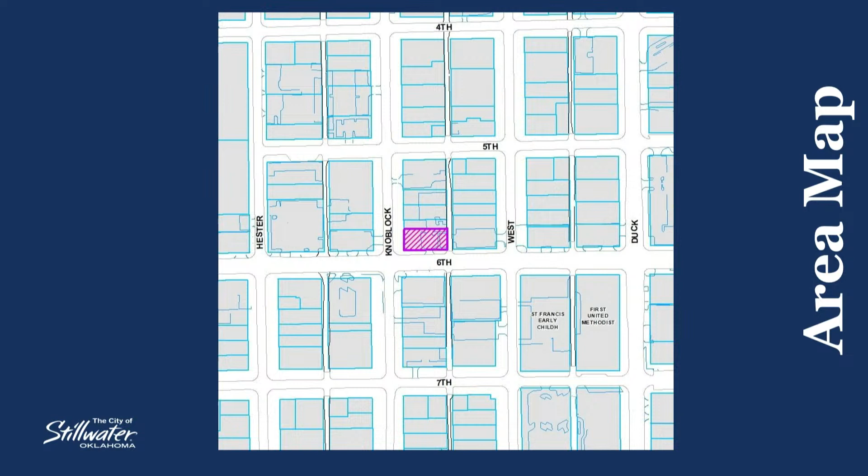You can see the subject property on this graphic inside the black hatch pattern, but you'll also note the other zoning districts in vicinity, including T5.

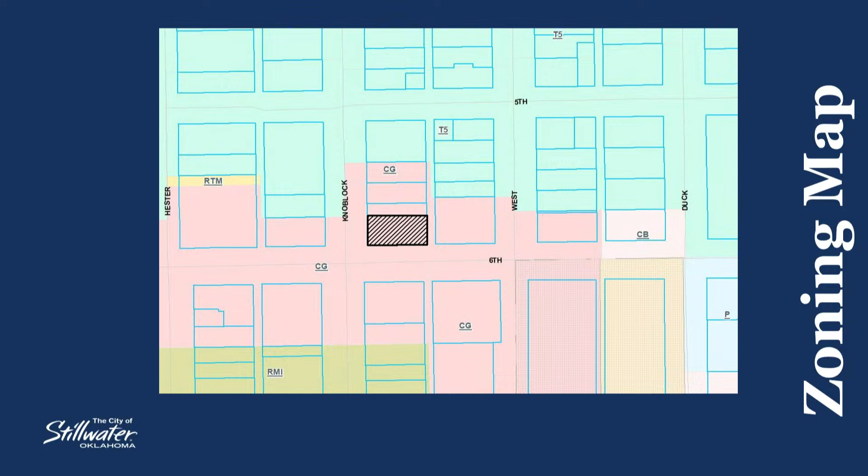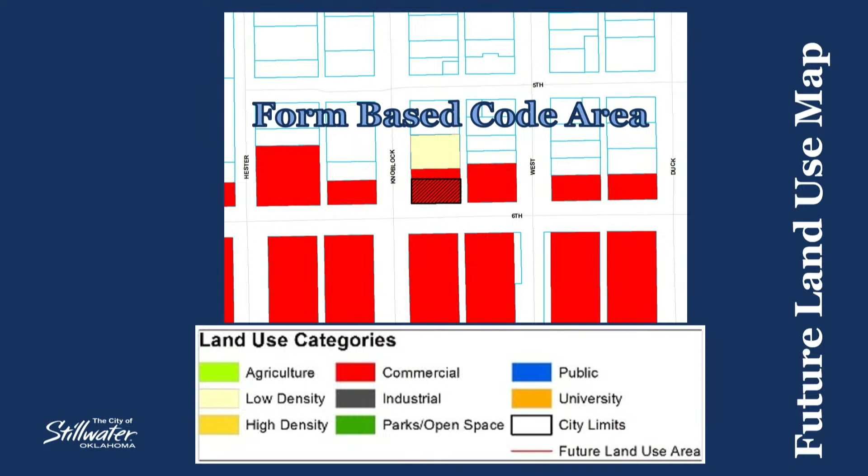The future land use map of the comprehensive plan indicates commercial along the 6th Avenue corridor, and that's better identified here on this close-up with the subject property inside the black hatch pattern. We'd note the area to the north in white is the form-based code area. That's that T5. On the future land use map, that's shown as its own inset. So we just wanted to give you some additional information there to help identify and clarify things.

Questions of staff? Questions from the commissioners? Seeing none, thank you, Mr. Harkins.

This time, I'd like to ask for anyone in the audience to speak in favor of this item.

I'm Diego Enzensberger with Ghost & Associates, and we're at 113 East 8th Avenue. We're here seeking approval for this specific use permit to operate a medical marijuana dispensary on property at 524 West 6th Avenue, and I can try and answer your questions.

Any questions from the commissioners? Thank you very much. Thank you.

Is there anyone else in the audience that would like to speak in favor of this item? Yes, ma'am? We cannot understand you all. You can't hear us? Is that better? That's better. Is there anyone else in the audience that would like to speak in favor of this item?

Seeing none, is there anyone in the audience that would like to speak in opposition of this item? If you'd like to come to the podium, state your name and address for the record.

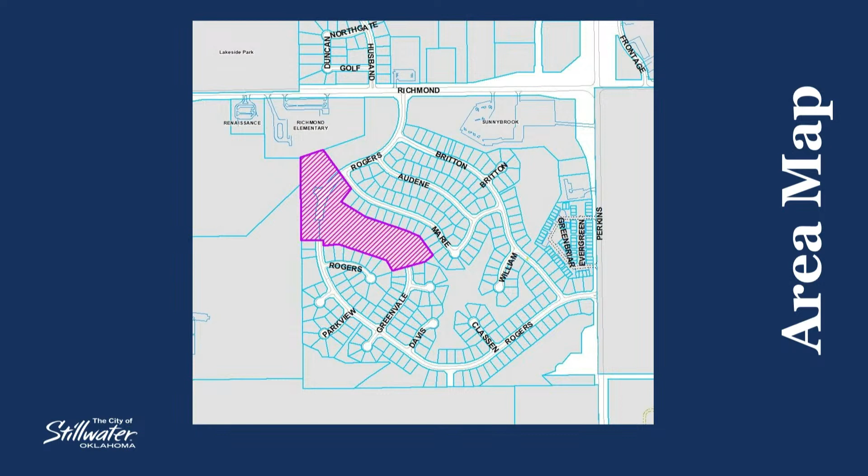Mr. Harkins. Thank you, Madam Chairman. Commission members, Ryan Harkins again for Community Development. Parkview Estates, Section 10 as proposed is before you as a preliminary plat tonight. The subject property is inside the purple hatch pattern on your screen. You can see some existing development that has been built out, other development that has been platted but not built out yet, and areas that have not been platted yet or taken through a preliminary plat, hence this section coming before you tonight.

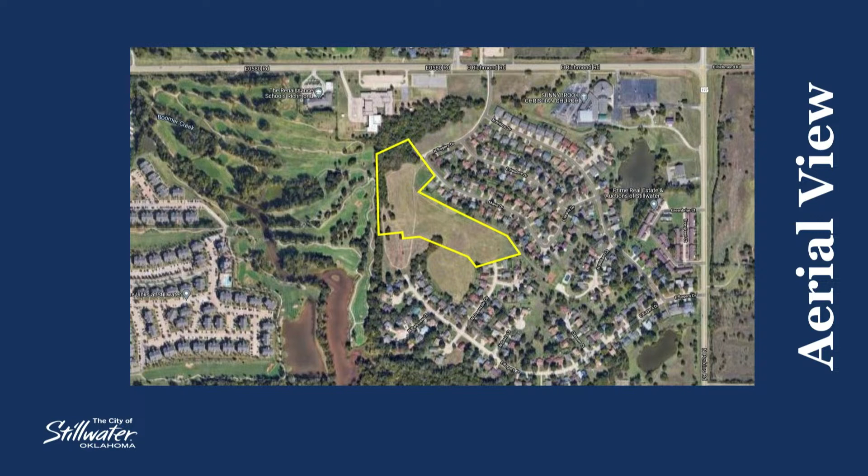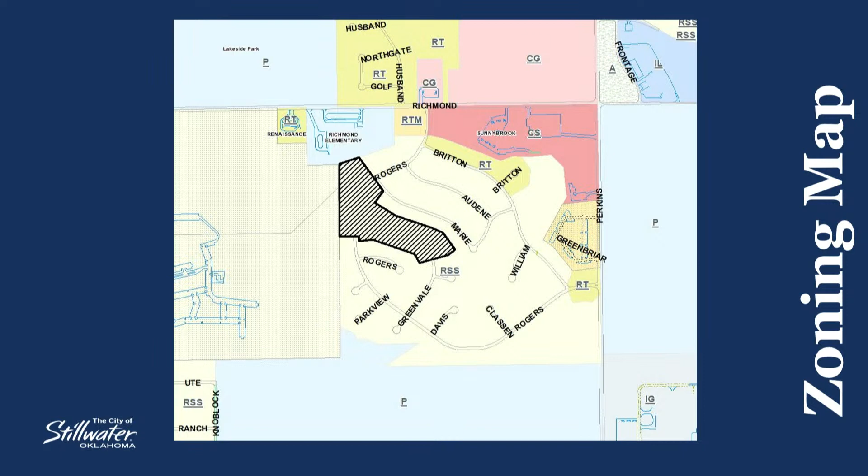You can see on the aerial a better view. The subject property is inside the yellow polygon, and you can see where existing streets start to connect to it. This gives you a better idea on the zoning. This is an RSS zoning district, small lot, single-family residential, so a 5,000 square foot minimum lot size is required, the same as the adjacent parts of this overall development.

You'll also note in the staff report a request for a subdivision exemption for one lot in particular, lot 14, in the northern or northwest part of the proposed development. The reason for the exemption request is that in RSS zoning there's a 50-foot minimum lot width, and lot 14 does not meet that standard at this time. They've supplied reasons dealing with drainage and topography as to why they're laying out lots 14, 15, and 16 the way they are, but the exemption request is specifically for lot 14. The other lots can meet the requirements.

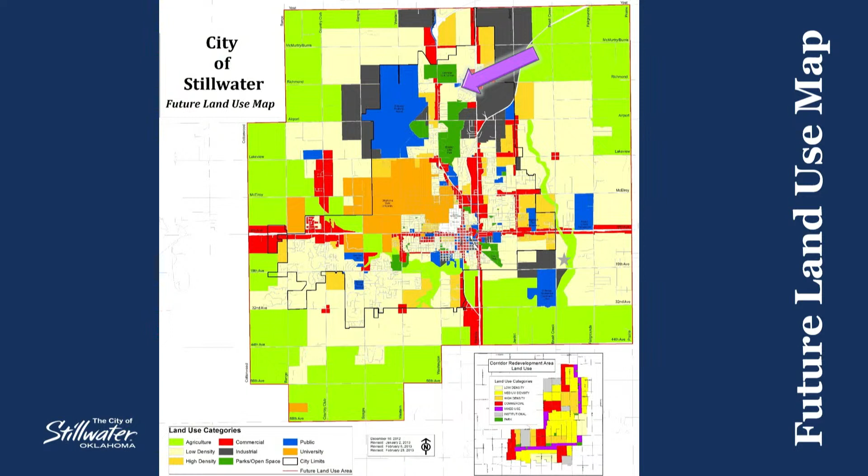The future land use map of the comprehensive plan indicates this as being an area of low density residential, which in the comp plan text can be up to 20 dwelling units per acre. The subject property on the close-up of the future land use map is shown in the black hatch pattern, again low density residential with some public and other uses nearby.

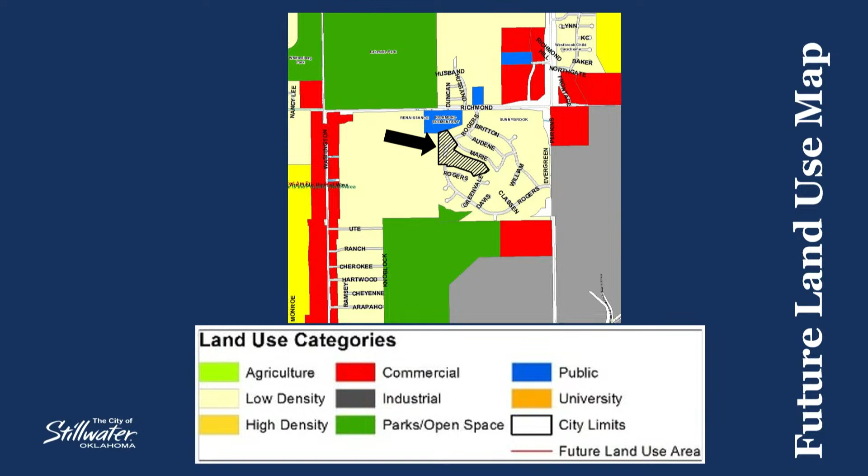I do know the applicant's engineer is here tonight and will try to answer questions as best they can. They're dealing with some vocal issues due to a sinus infection, but want to be responsive. Staff will also note, before we go to the public hearing, an email we received this afternoon dealing with drainage issues in the proposed development. We also know from phone calls today there are concerns dealing with drainage and access as well as sight lines. So, any questions staff can answer before the public hearing is opened?

You mentioned 20 per acre? Correct. The comprehensive plan talks about low density residential being a dwelling unit density of up to 20 units per acre. Okay. And they're proposing 37 lots, so we're well below that threshold. Okay.

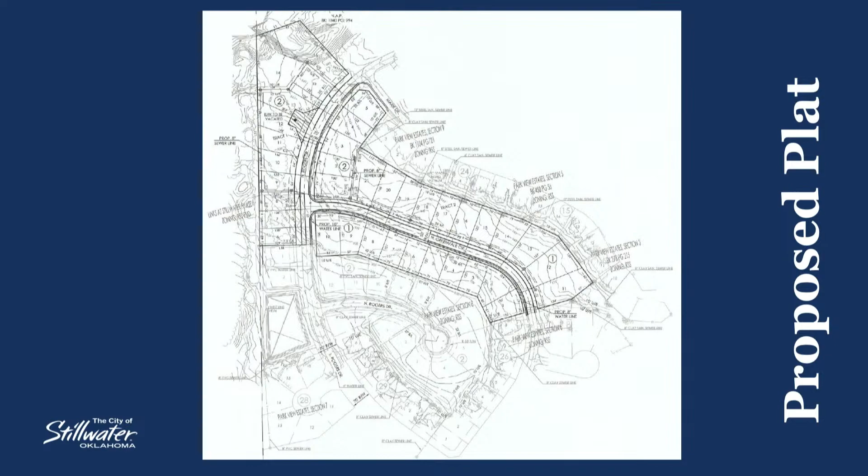If it is mowed short, the water is able to shed and go that direction. When the lots are a little bit higher, that water literally backs up. I do understand the curbs are there to act as waterways, but most of the time when the water is up over the curb, it no longer is effective. It's actually going to come into our yards. So I'd like to echo that as well. Thank you for your time. I appreciate your consideration. Thank you very much.

Anyone else who'd like to come speak in opposition, please state your name and address for the record.

Hello, my name is Julia Ray. I live at 4719 North Britton Drive. As a clarification, I am a member of the Homeowners Association for Parkview Estates. Just some concerns—I think opposition might not be the best word, but we'll echo the drainage concerns for the neighborhood. The flood we had several years ago was quite significant and bothersome for those homeowners. It's a 47-year-old neighborhood—I'm 45 and I don't work like I did 20 years ago—so we have some 47-year-old infrastructure, and that's a concern.

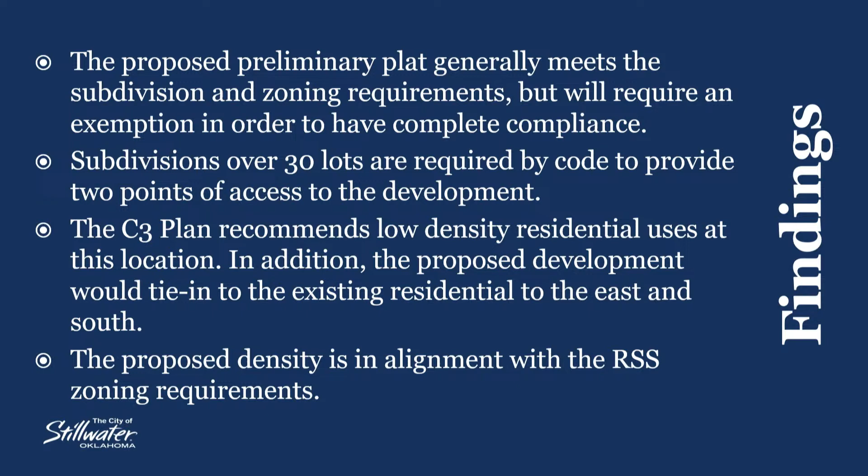Staff feels that if the issues regarding drainage, which the drainage report has been approved by the city engineer and their staff, and the infrastructure issues can be resolved, staff has no problem recommending approval of the preliminary plat. We do understand there are a number of considerations and concerns raised, but having said that, with these findings, the alternatives available to you are to accept the findings and approve the proposed preliminary plat as presented.

You can approve this plat with conditions, noting what those conditions are and what should be met for approval of the final plat. If you choose that option, we will develop a letter listing those conditions for the developer and their engineer, and it will be signed and become part of the record that goes with the plat. You can also reject the findings and deny the request for the proposed preliminary plat as presented.

But if you feel there's additional discussion or information needed, you can table this item to a date certain. We note here that you have to table the request to a certain date, noting that action must be taken within 60 days of the public hearing. So, for example, if you wanted to delay to the first Planning Commission meeting in January, you could do that, giving the developer time to address any of these other issues or bring additional information. But you would need to take action within 60 days of this date.

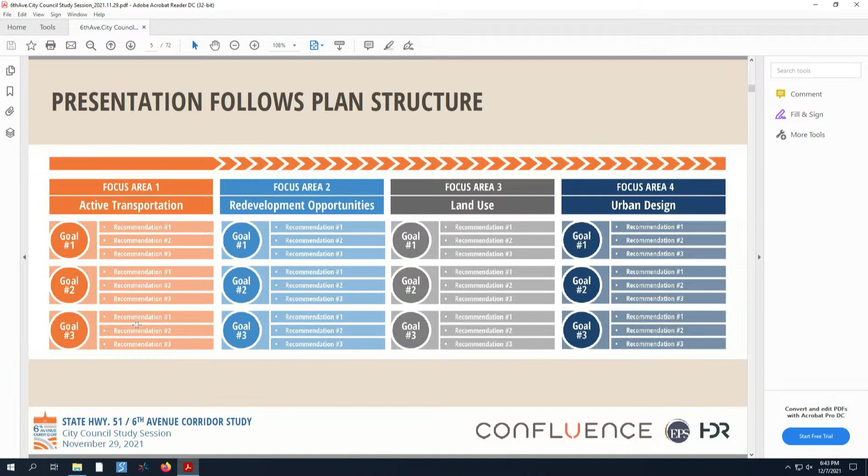So let's talk first and foremost about that. Goal number 1, with regard to active transportation, that became a key issue, is trying to connect the north and south sides of 6th Avenue. 6th Avenue is a right-of-way that acts like a zipper in the community, meshing 2 different sections, if you will. Those areas we heard from people early in the process said it's very difficult to get across. It functions as a great roadway, but it's also a barrier at times. So we tried to look at key connections going north-south and develop infrastructure to help support that.

One of the things we looked at, as you see in recommendation number 2, is using a stream called Duck Creek over by Westwood Elementary to get people across 6th Avenue. And one of the things we knew from the beginning of the process was discussions about a rails-to-trails conversion for the railroad tracks over by Perkins. So that's one of the recommendations as well, trying to pursue or continue to pursue that conversion, along with a continuous north-south connection at key intersections.

We also looked at trying to enhance circulation and connectivity by having a more complete and active transportation network on key east-west streets, as well as off-street paths around the perimeter of Westwood Elementary to help connect that area to a broader network. And then we tried to coordinate more with OSU to help connect this system, as it gets built, to an internal system on campus and then beyond to a greater part of the community.

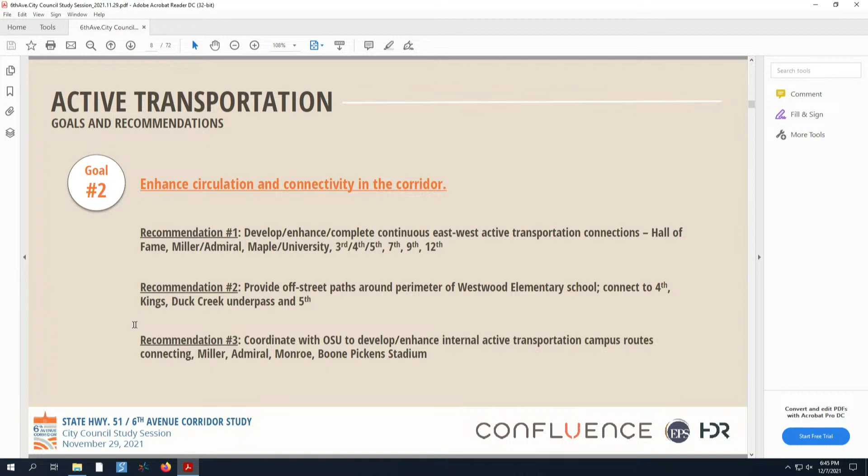One of the other goals with regard to active transportation is trying to connect the OSU campus to downtown. That was one of the issues we heard from the very beginning—for years we've wanted this, but we've never done anything about it. So this tries to address that issue, not only with an active network dealing with key streets, but also dealing with some of the crossings.

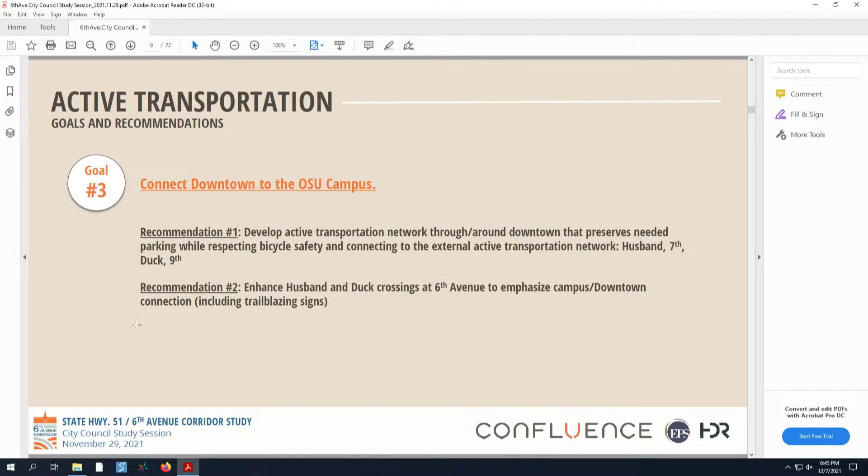So to give you a quick idea, again we looked at that north-south connection across 6th Avenue, but also key east-west routes that could run parallel to 6th, with the idea that we know there will be people at times on 6th, whether jogging or biking—you won't stop that. But what we can do is try to provide a robust network of opportunities that run parallel to 6th Avenue, giving people more opportunity in a safer environment to stay off that corridor and still have the ability to connect from, say, out by Western and 6th into downtown.

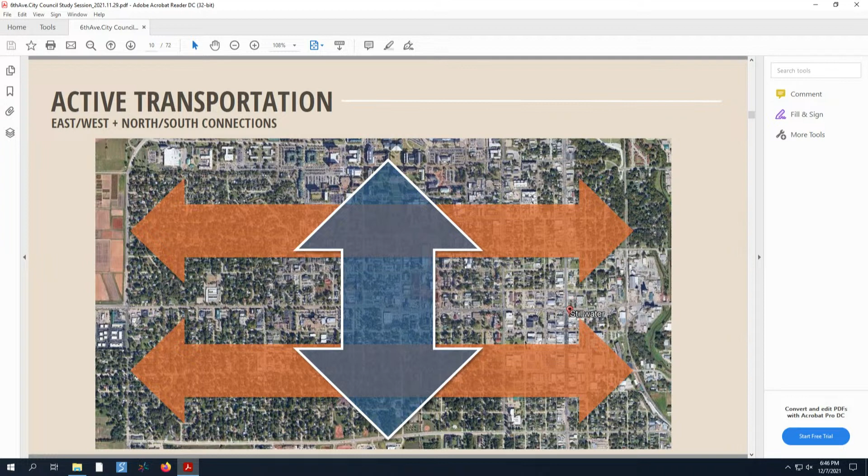And we did that through different sets of intersection improvements and facility types, and you'll see some examples of that in a moment. One of the things we looked at is what's there now, what could be changed to improve that facility in that key location to help provide better access or connectivity, and how do we connect to what's already there.

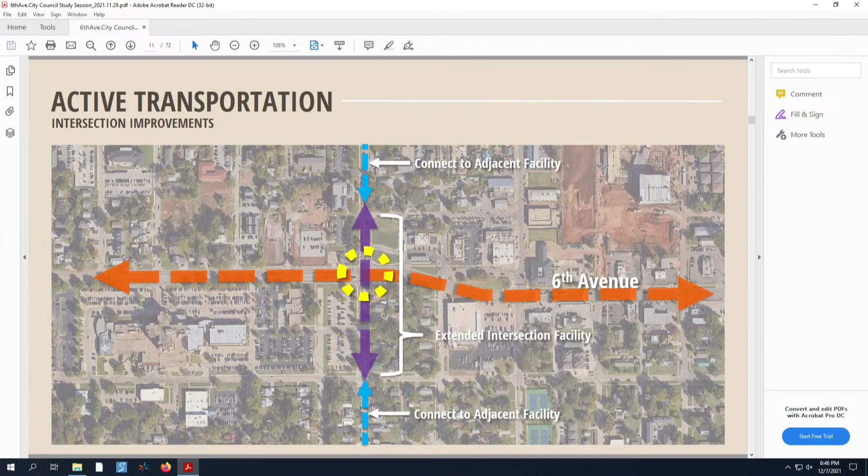Here's some of the facility types we recommend a mix of. One is obvious, the off-street multi-use path, which is probably what people think of first. Another is an advisory lane where cars and bikes share the roadway, with an area striped for bikes that cars can use when there's no bike present. Then there are different types of bike lane facilities: unprotected, buffered, protected, and separated, each varying in degree of safety and mobility, but also changing the roadway overall.

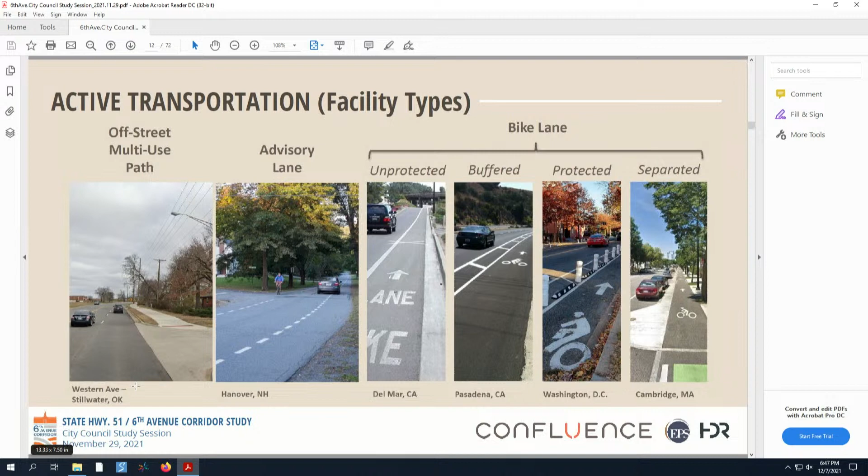Here's an overall picture of what we've proposed for recommendation and approval. You can see the existing 6th Avenue corridor here in orange, and existing traffic signals in red. We're proposing utilizing the existing system on University and 9th and expanding it with wider bike lanes, redoing those streets, and at key spots adding potential traffic circles to help slow traffic and make it safer for bikes and pedestrians, along with parallel routes on 4th, 5th on the north side, and 7th on the south side. The idea with 7th is that it would come from downtown out to the west, potentially out to the Duck Creek area, making a north-south connection across to the Westwood area.

Pardon me, Mr. Harkins, I think there's a question from the audience.

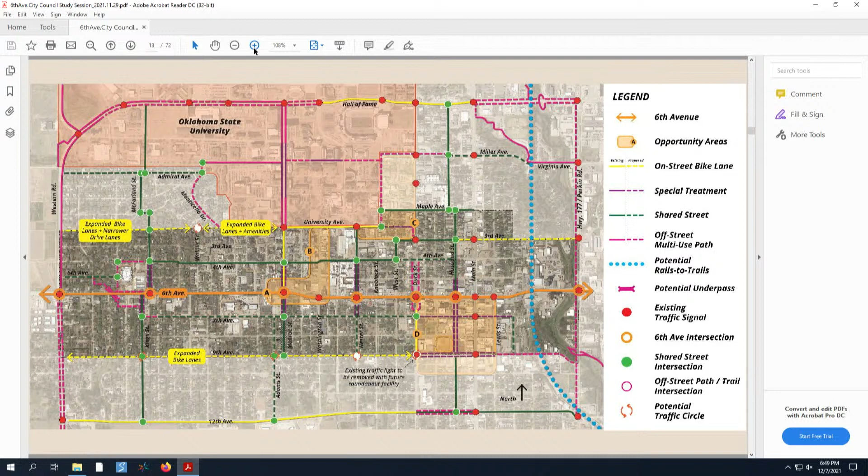On that map, because I looked at the PowerPoints ahead of time, I was confused on where it says Hester—it's all blackened in across there. What does that mean? Oh, Mr. Harkins, could you reiterate the question, since anyone watching at home wouldn't be able to hear it? The question was regarding Hester Street, where the color pattern appears to some as black, but is actually a purple and green line work, dealing with a proposed set of improvements to that corridor for treatment to separate bikes and pedestrians from vehicle traffic.

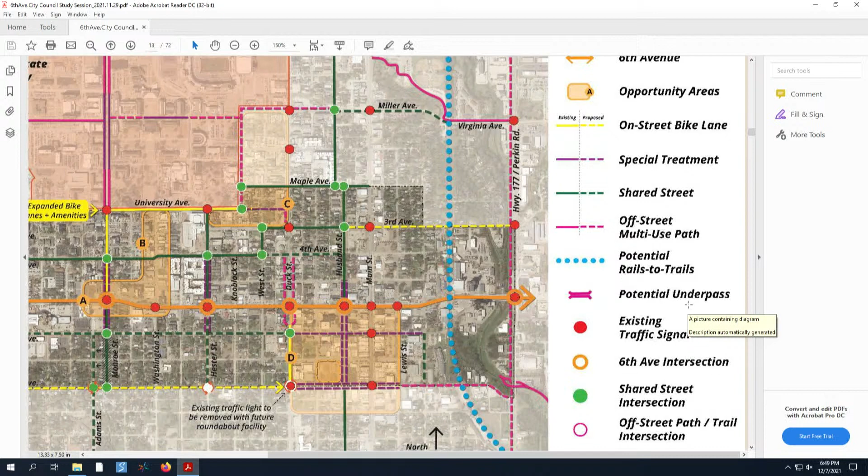Okay, that's not a potential underpass, right? No, the only potential underpass is near Westwood School. No—the question was, is that a potential underpass? But no. So 7th Street would receive treatment for a bike lane and pedestrian improvements, extending out toward Kings, working up Kings over to the Duck Creek area, then crossing under 6th using an underpass to connect to the north side.

4th and 5th would be a connection. Mr. Harkins, I think we have another question from the audience.

I'm Carolyn Whitener, and I own the Mazzio's. They're on the corner of 6th and Hester. I'm very much concerned about how much you are going to take off, because I understood you're not taking it from the south side of 6th Street—you're taking it from the north side.

So the question deals with how much right-of-way would be taken. That would be the engineering design for the street itself; this does not relate to that specifically.

But when am I going to find out? I've got a leaser that's having a fit. I know ODOT did a public hearing—they did it virtually online. We found out about it really the day the public hearing started. I know there was information put out in our social media outlets and a press release about it, and one of the OKC television stations picked up the public hearing process for the engineering design.

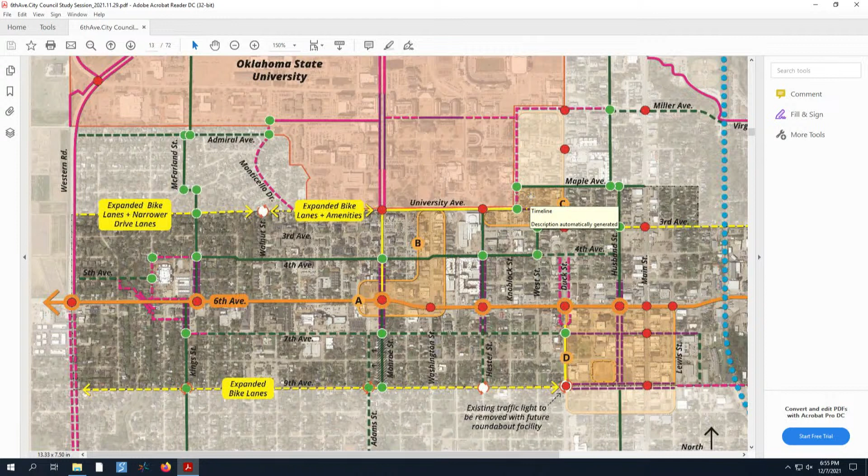So here's an example of some of those detailed intersections. Again, this is a planning level type of document. As we go through some of these specifics, as far as corridors, we'll get more into engineering design at a later date, but this is kind of where we're at right now.

The idea with 6th and Kings is to create along the north side of 6th, where Westwood Elementary is, a 10-foot wide sidewalk path as part of that ODOT project. Then extend the 10-foot side path south to 7th, with pedestrian landings at the corners like you see here. That would take out some of that parking along Kings south of 6th and reconfigure some of that overall in the long term. We feel it provides an opportunity for additional pedestrian safety and connectivity in this area.

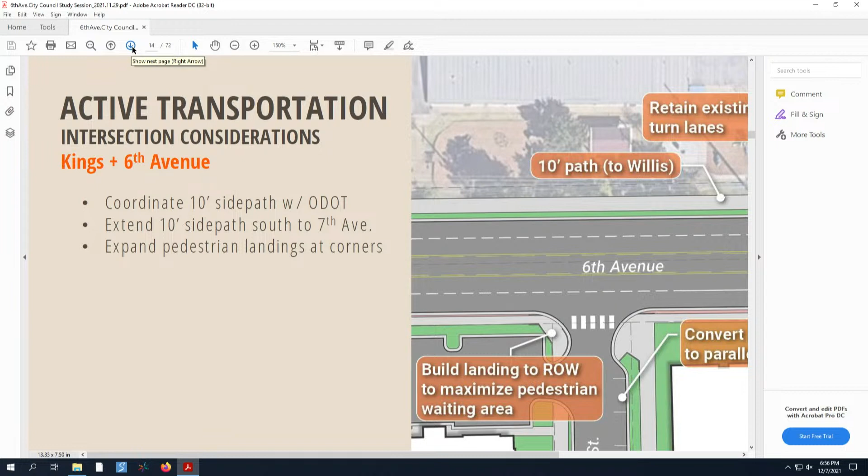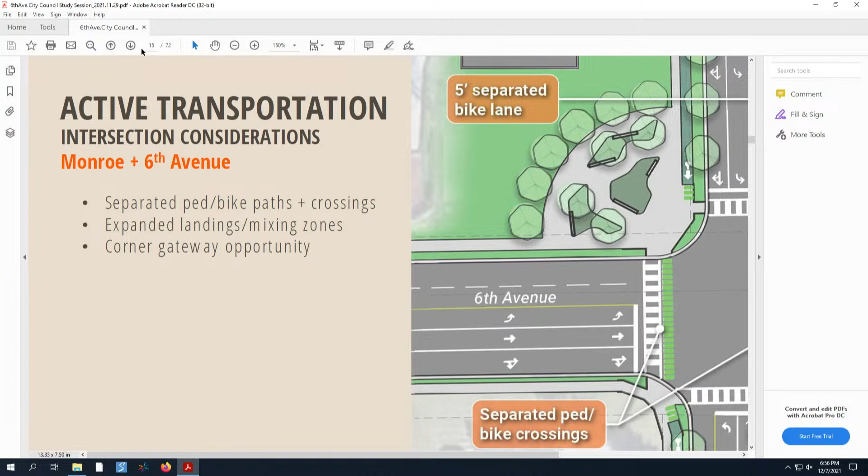When you look at Monroe and 6th, we're looking at more separated bike ped crossing lanes through this intersection, including a 5-foot separated bike lane, as you see. This also goes to the idea that this may help open up more of that corner for potential redevelopment in the long term.

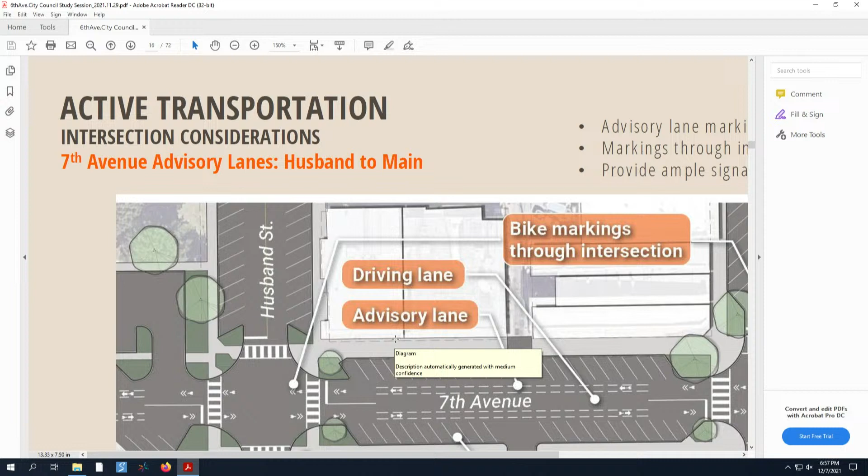And this is something you could begin with and then potentially build out upon if you were to build additional off-street parking capacity in or around the downtown as well.

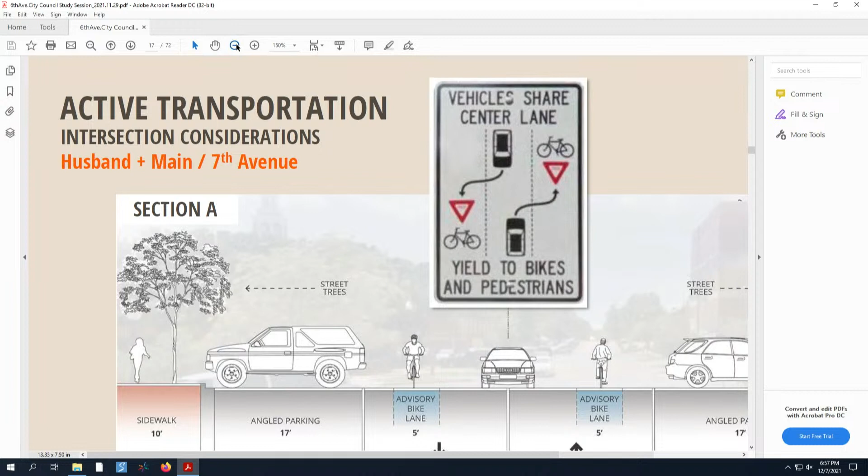So this sign gives you an example of how that advisory lane system works, and this cross-section will give you an idea of how that can work on a street. You could have a 10-foot sidewalk, angled parking, and then the advisory lane, a 2-lane roadway area that includes each of those advisory lanes, and then angled parking on the other side, plus another 10-foot sidewalk. That gives you a 90-foot right-of-way to work with, and these are things that can be adjusted as we go into more detailed engineering design for specific streets.

This gives you another cross-section. This would be like Husband and Main and 7th, just to give you an idea of how this works and how you can adjust the lane widths.

So based on how we... Mr. Harkins, I have just a quick question. Could you go back and show those sections? This made me think, because you were showing the area of 7th there, just to the east of Husband. I know we do have some locations, commercial businesses in these areas, particularly restaurants, that take food deliveries in the streets. Would that continue to work the same way with this? Would this in any way impede that practice that we have now? Because we don't have alleys really for people to service their businesses.

Right, it's a great question. This doesn't necessarily have to impede that. Again, we can start to make adjustments to this, A, as you build off-street parking capacity or parking structures, or B, as you want to change some of this parking to be more dedicated, for example, loading and unloading for delivery for, say, a restaurant. Okay, great, thank you.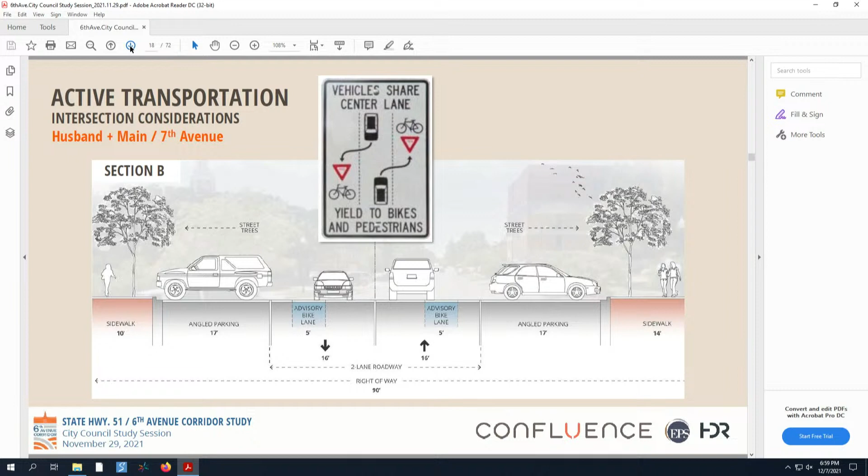And that specific question is something we heard even when we talked with council a couple weeks ago in study session. So to give you an idea of how this potentially could help spur other redevelopment opportunities, or fit in with existing redevelopment options or opportunities in the community now.

We identified 3 in the study. One is Campus Corner, and we made a tie to the proposed hotel convention site that is in design right now. One is the Strip, and then one is Monroe and 6th. We looked at that one because of the way between the engineering design and the potential bike ped improvements could help provide additional redevelopment impetus.

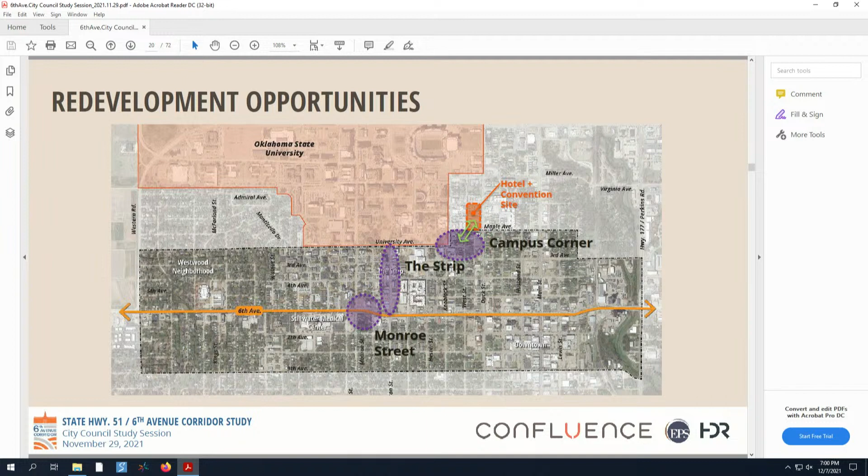So here's what we looked at as far as a goal: trying to create additional student-oriented entertainment and amenities adjacent to campus when it comes to the campus corner area. We wanted to help revitalize existing property, introduce new options, entertainment, shopping, things like that, and do this in a way that can help prioritize efforts to recruit businesses that complement what's there now, whether it be the strip or the campus corner or other areas near campus. We don't necessarily want to take away anything, but we want to add to what's already there.

Can I ask another question? Yes. You never did answer me. Is it true that you're going to take the land from the north of 6th Street? I don't know how the right-of-way lays out right now. I can't hear you, I can't answer your question. I don't know the specific way.

The question was brought up again: is the city taking right-of-way on the north or the south side of 6th where Mazzio's is? That is something planning staff right now does not know the answer to directly. We can get the answer for you if that's okay. That's the other reason I asked for your contact information, to get a better idea of what right-of-way is being taken. Called ODOT, is that it? It's sponsored by ODOT. Okay, I can help get the answer, I just don't know it right now. Will you know it in the morning before I leave? What time do you leave in the morning? You tell me. I will try and have it by 10 a.m.

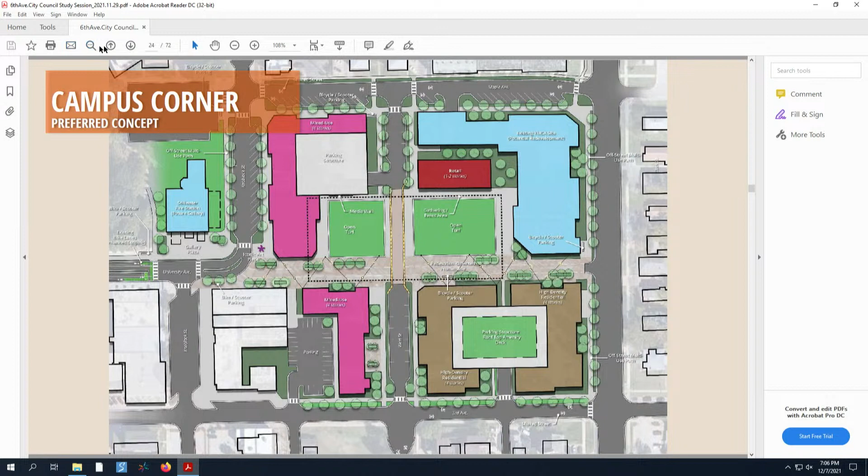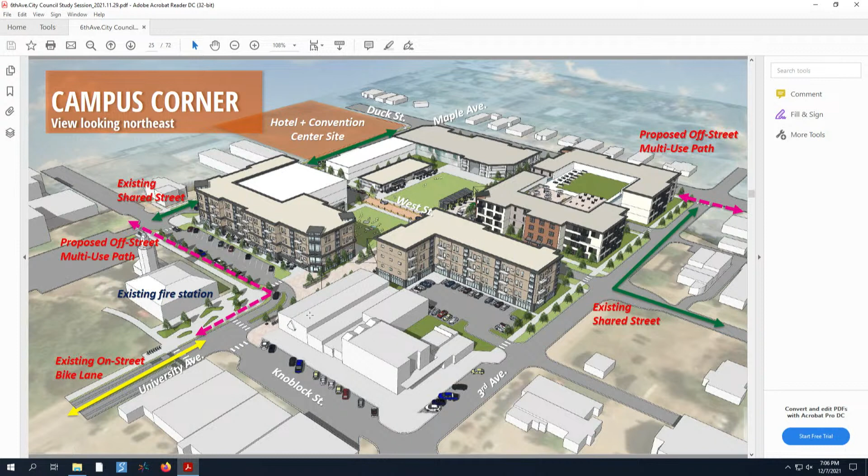This gives you a bit of an aerial perspective, showing the convention center site looking to the northeast. So University would be here being extended. Here's Third, Knoblock, and then University. These potential connections would connect to bike-ped systems being proposed in and through these blocks, and again this could complement the hotel and convention center development fairly well.

So you can see those mixed-use buildings here, that high-density residential, and then potential YMCA or other redevelopment, and retail here.

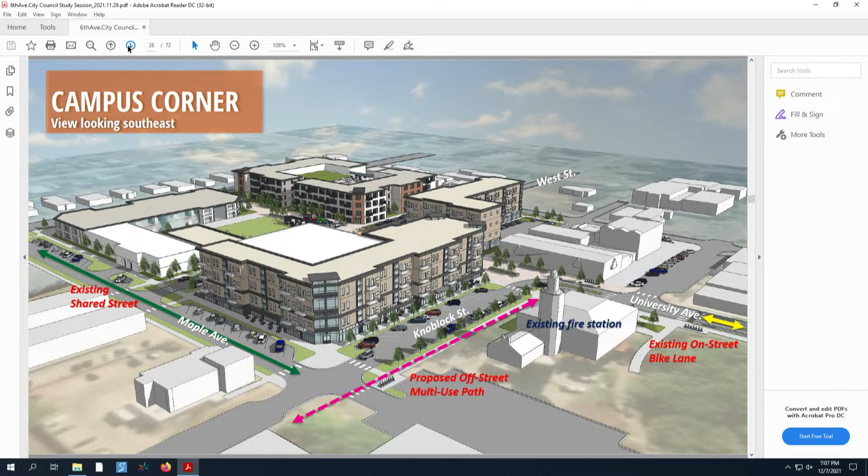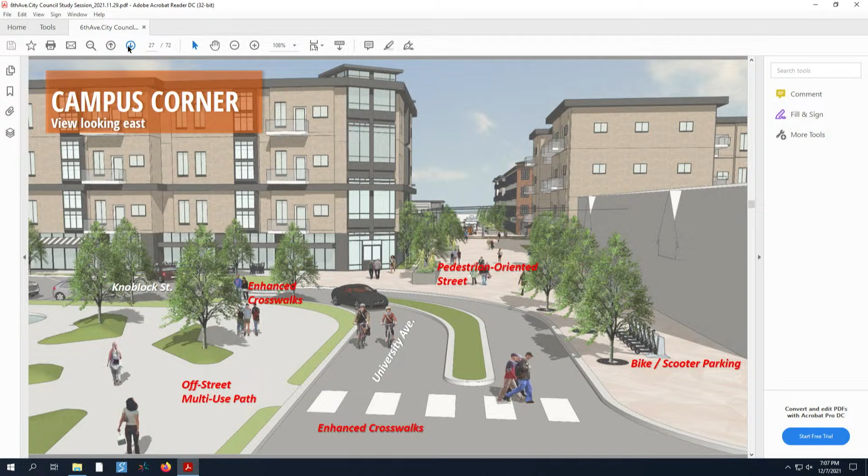This gives you a perspective looking to the southeast. And then this puts you at street level at University and Knoblock, looking to where that extended pedestrian corridor for University would extend out toward Duck. This gives you more of a street level view to see how some of the enhancements could work together to create more of an urban design fabric that is able to help draw and hold people in this area.

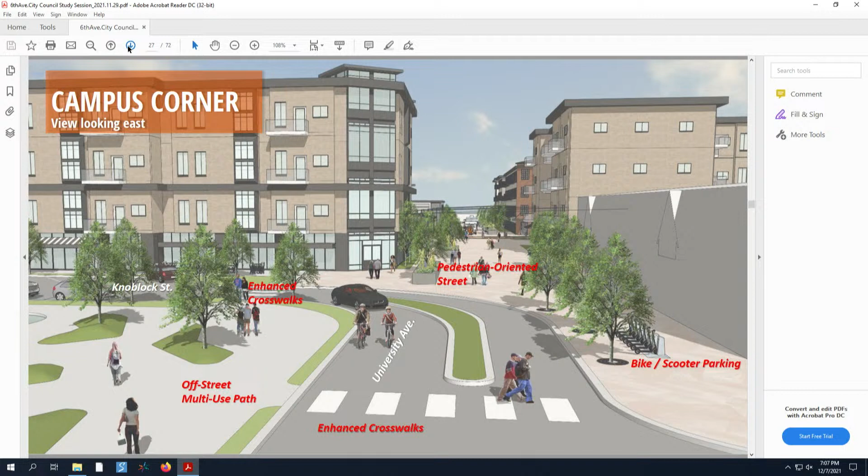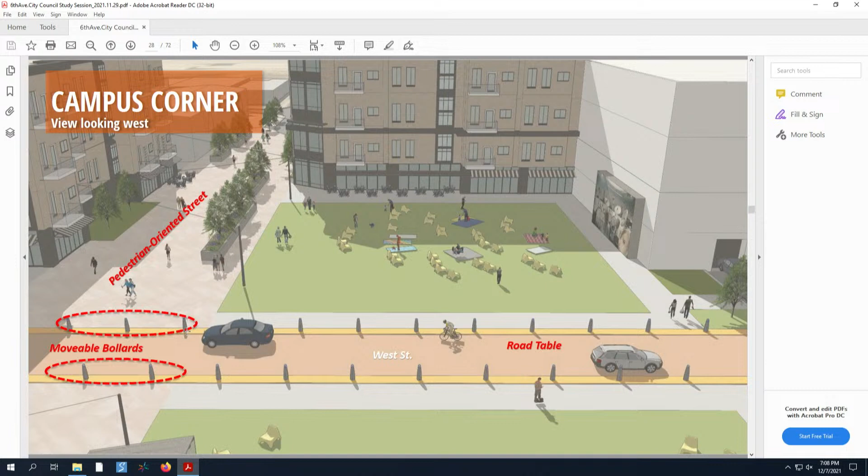The consultant threw in the idea of the road table, where this could be an elevated roadway if you keep West Street open for services or emergencies, with the idea that you could have movable bollards to help shape the space as needed for different events. This gives you another idea on the perspective for the road table, just to see how event space could be developed and built in this area.

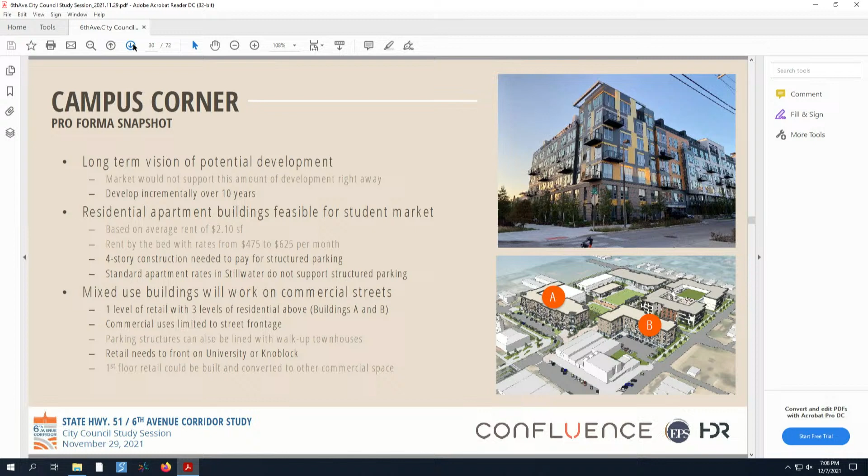The consultant also had on their team an economic development sub-consultant who did a pro forma to help show how this could be built out over time, how it could cost flow, and what it would take to make some of that happen. I'm going to move through that part a little quicker.

The next redevelopment area is Monroe Gateway, trying to help open or improve more of a front door. One of the things we heard from the OSU Foundation was that they consider Monroe one of the fronts doors to campus as people come off 6th. So how do we introduce things using this bike ped system, this alternate transportation system, to help create more opportunity?

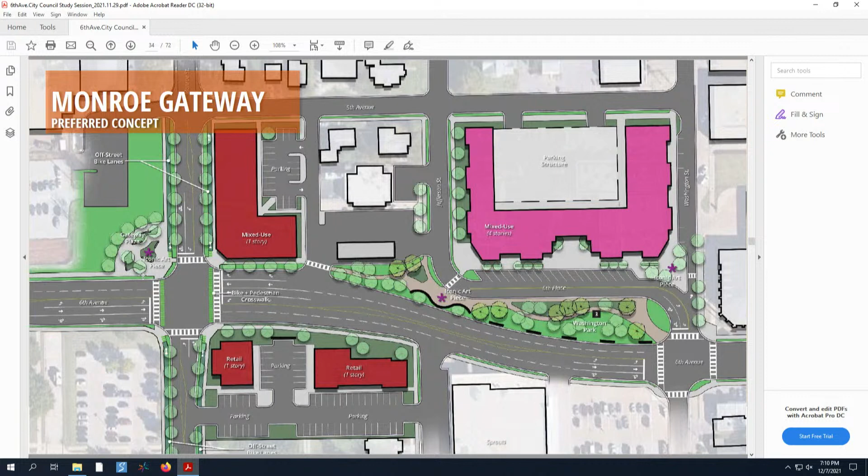Looking at the existing gas station, we're potentially doing a 1 or maybe 2-story mixed-use development building here, with potential retail on the south side. Looking at the area where Washington is, we'd start to redevelop some of this block with a parking structure and potential mixed use, with a maximum of what we propose here of 4 stories. Then reconfiguring 6th Place and providing additional landscaping and urban design features to help with buffering along the 6th Avenue corridor. Along Monroe you can see some plaza features and the bike ped system in this overall graphic, and how that fits into a larger pattern.

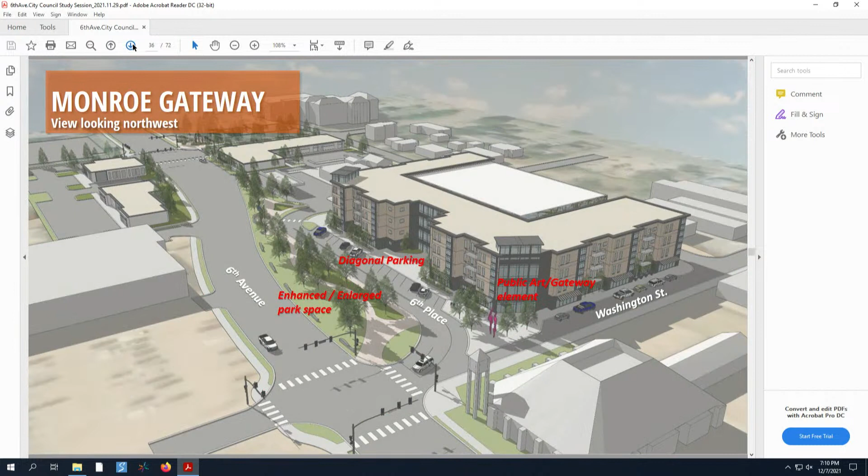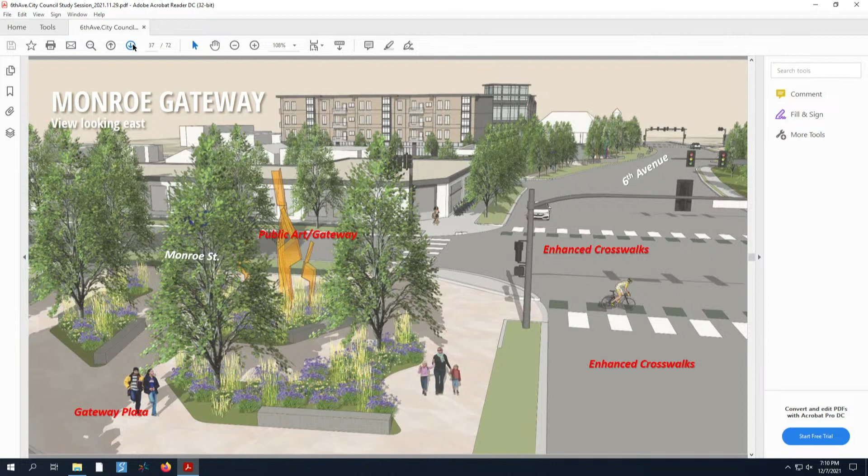This gives you a different perspective, looking at 6th Place, 6th Avenue, and Washington to the northwest. At street level, this gives you an idea of how some of that public art and public gateway type redevelopment could fit into the overall fabric of the corridor.

With Washington Street, we looked at how to maximize bike ped use while balancing the need for parking and vehicle circulation. Even at the study session with council, one thing we heard was you need to think about loading and unloading. So that's definitely a theme we'll need to look at, especially as we go from planning level concepts into engineering design.

One of the things we looked at was converting Washington Street to a one-way, converting one side of the parking options to parallel, which could be an example of how parking stalls could be converted into loading and unloading.

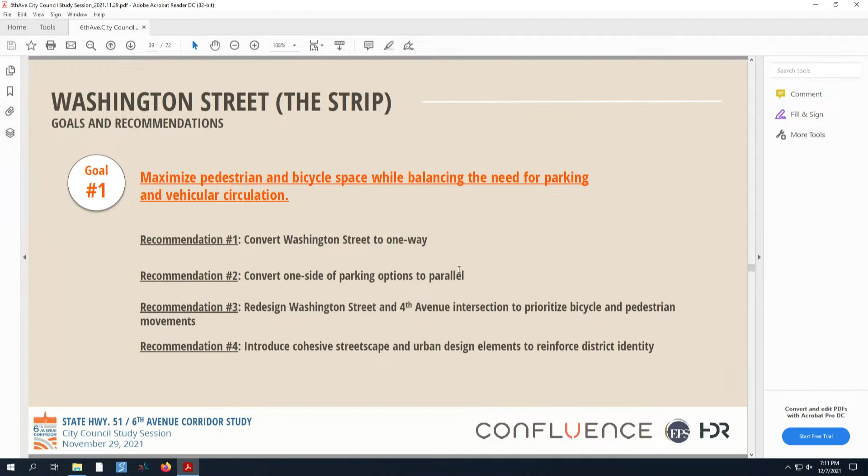Looking at redesigning 4th and Washington, and having a more cohesive streetscape. One thing we heard at council during this study session was, from one property owner, don't do trees on the strip - they'll die, get beer and pop and everything else dumped on them, and get ripped out. Just do hardscaping and ornamental things that look like trees. That's some of the feedback we got even recently, again trying to improve the overall experience and image of the strip.

So here's what we looked at, with north to the left of the screen. The consultant team came up with the idea of reconfiguring 6th Place, but also redesigning parking along Washington Street from 6th Place up to University. From 4th going south, angled parking on the left side, parallel parking on the right. Then from 4th up to University, that switches.

We looked at this, and in this concept we were actually able to add 5 to 7 parking spaces on top of what you see on the strip now. So the potential is there, and that would change depending on what we came up with at final engineering design, which would be a later project. This includes the idea at 4th and Washington, with some reconfiguration happening to help improve bike ped flow.

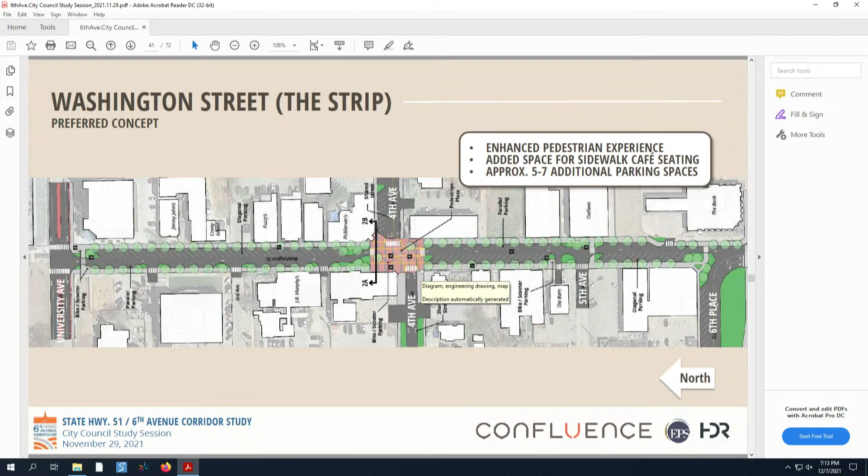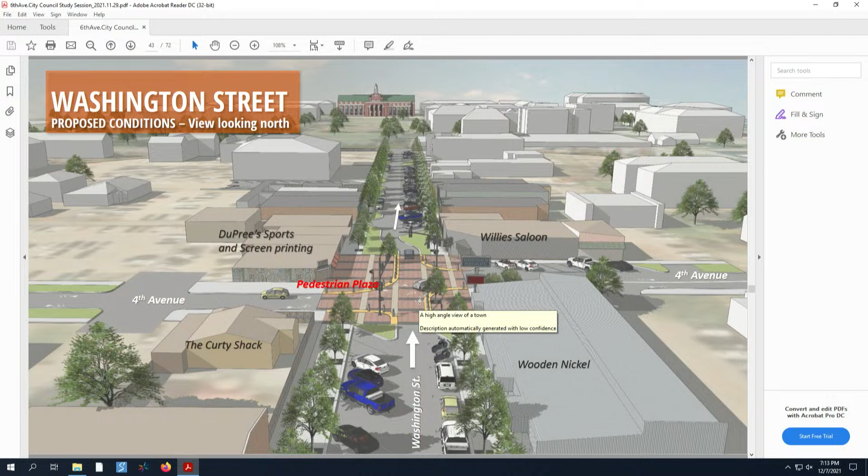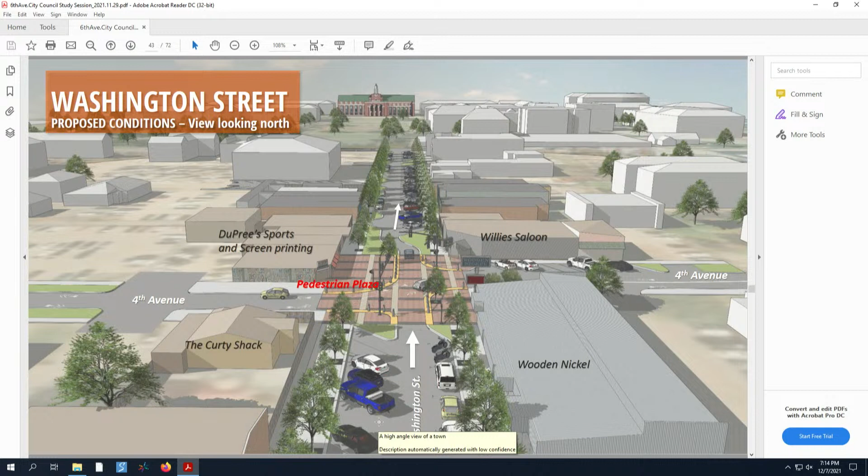Pedestrian Plaza at 4th and Washington with essentially bollards and other improvements to help guide vehicular traffic, and provide more bike and pedestrian space at that intersection to help minimize the amount of space needed to cross. You can see the angled parking on one side and how it flips to the other side.

This is an existing view looking north, and then another proposed view of how that could be done with the landscaping and streetscaping elements.

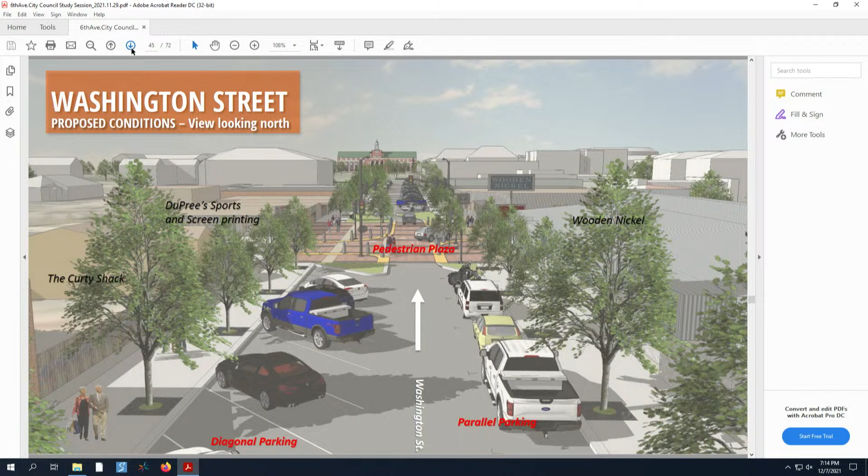And another one that goes from existing to proposed, and this gives you a better idea on a detailed level of how that road table would work.

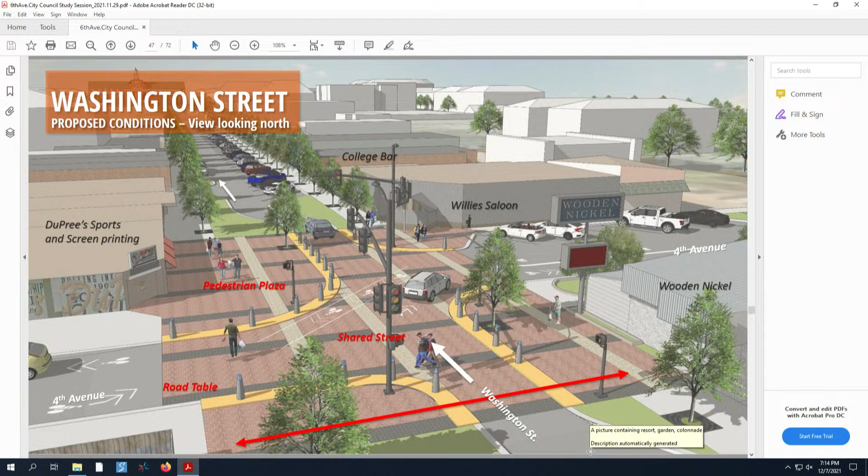This would be elevated from the original street surface that you see on 4th. So for example, if you're going east on 4th through this intersection, you will go up onto the top of the road table, come through the intersection, then come down and continue on 4th to the east. Same as you're going north on Washington through that intersection—you'll go up, across, and then down.

Another example, this is looking north of 4th, just to give you an idea of a one-way landscaping street area, landscaping area, and then sidewalk.

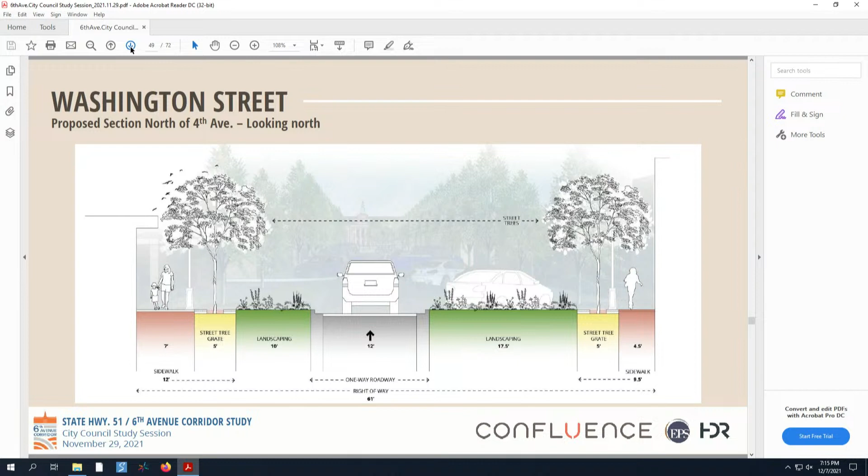One of the other areas we looked at was land use, and we didn't spend a lot of time on this simply because a lot of what we saw was already in place or had the potential to stay in place and or redevelop already with specific directions. But there were some key areas we wanted to look at. We wanted to focus on higher density development and redevelopment around campus. We wanted to preserve the Westwood neighborhood—that was one of the things we heard early on, that we want to leave that as single family residential. We also wanted to protect existing single family neighborhoods as much as we could.

But we wanted to focus on a couple of key areas in particular: redevelopment and transition blocks. These were areas around Westwood, and we looked at this as kind of a buffer scenario and how to help protect Westwood, knowing that there will be continued pressure along 6th Avenue specifically over time with redevelopment.

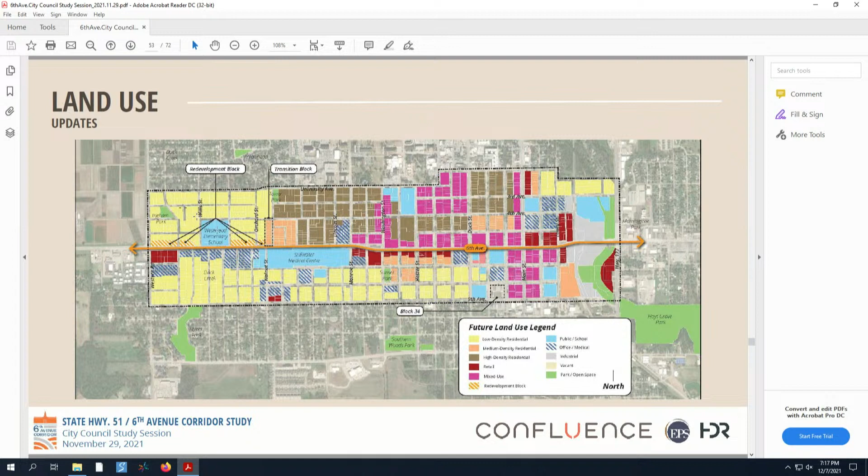So what we looked at, for example, at 6th and Western as a transition block was the idea that we go from a curb cut on every single property to having access that would come off of, say, Ridge. So parking would be in the rear. Those buildings would be able to have street frontage, but you would not be coming in off of 6th onto that property—everything would be rear loaded.